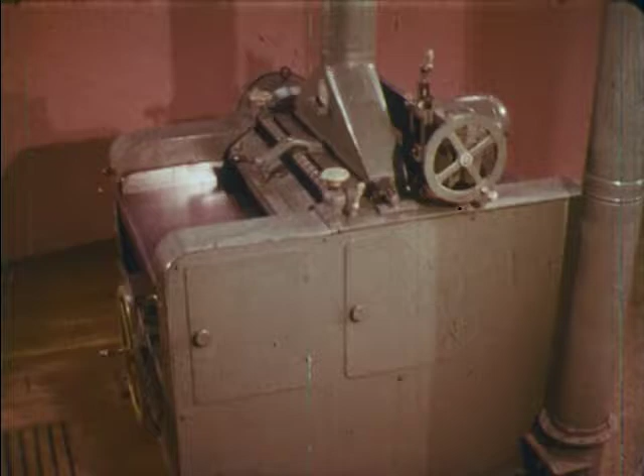The single-surface planer planes lumber to an even thickness. It is usually one of the largest and most expensive woodworking power tools.

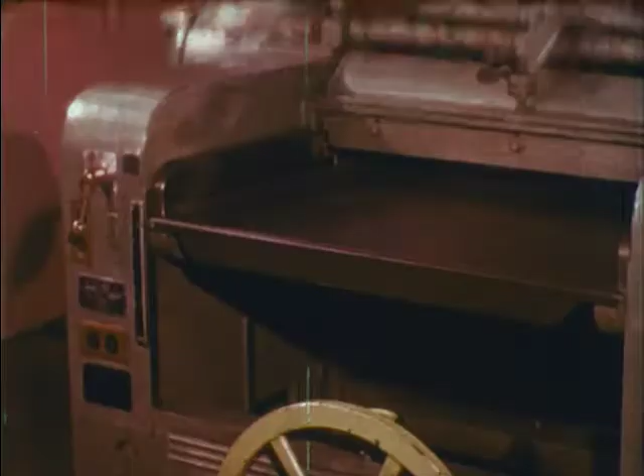This machine makes it possible to easily plane a number of pieces to exactly the same thickness.

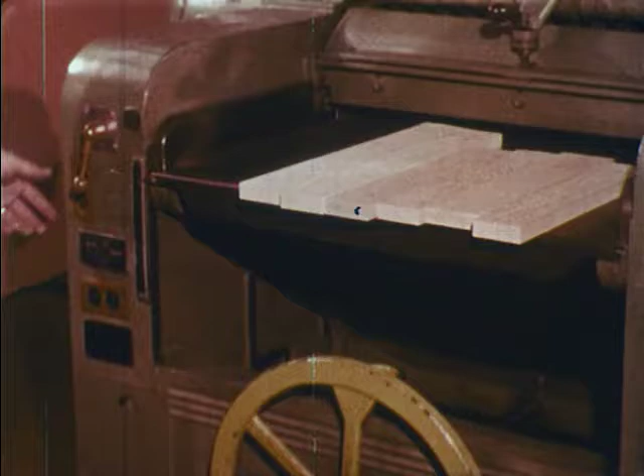If its capacity permits, it can plane large glued assemblies, such as cabinet tops, to a uniform thickness.

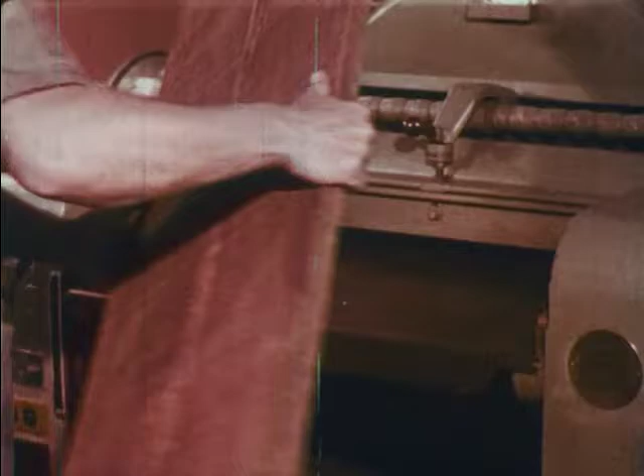The question is often raised: why not joint both faces of narrow stock on the jointer instead of using the planer? Maybe this piece will help clarify this question.

One face has been surfaced on the jointer, the other is still rough. We could smooth the rough face on the jointer, but the piece would not be the same thickness throughout. Regardless of the number of joint cuts, the piece would not have parallel faces.

Running the same board through the planer will produce parallel faces because it cuts off the top in direct relation to the bottom.

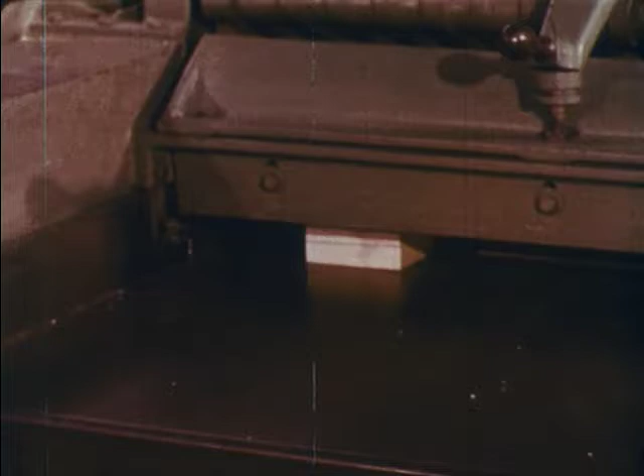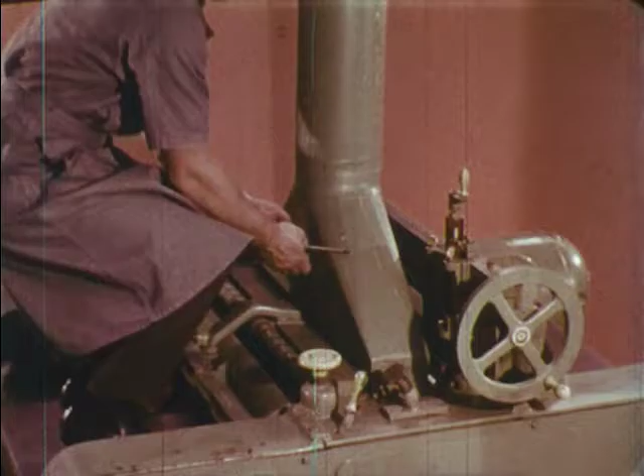The cutter head is located directly below the exhaust shroud. The size of a planer is determined by the maximum width of stock it will plane. The length of the knives determines this width. This is a 30-inch planer, therefore it can plane stock 30 inches wide.

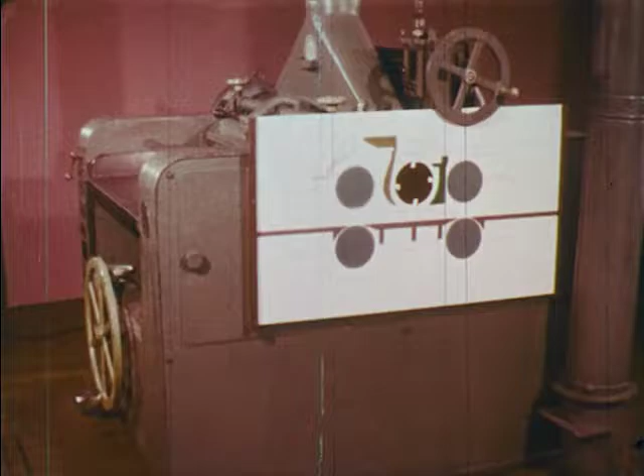The primary parts of a planer are the upper and lower infeed rolls, chip breaker, cutter head, pressure bar, upper and lower outfeed rolls, and a table that adjusts to various heights. This adjustment determines the finished thickness of stock being planed.

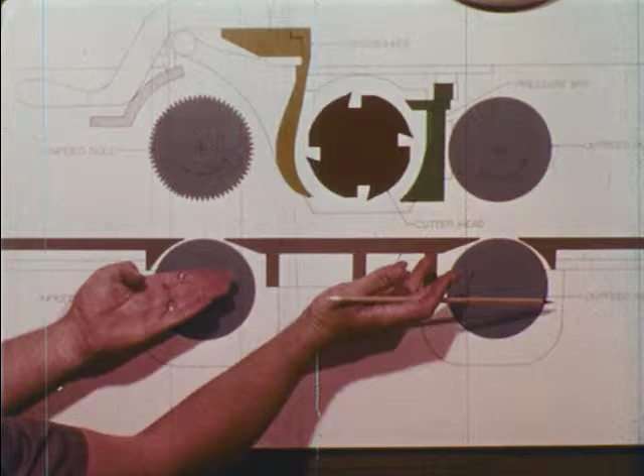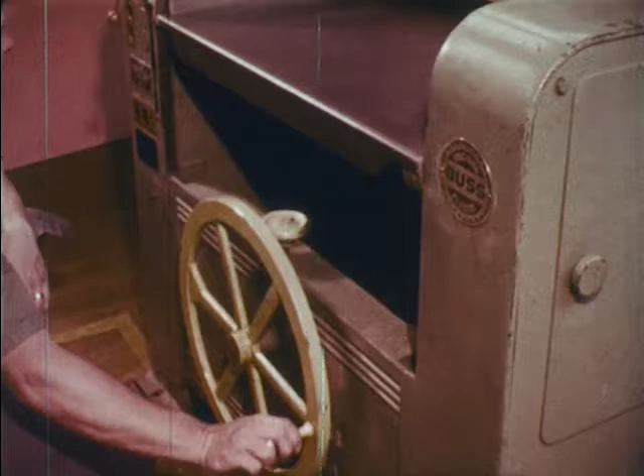Do not operate the machine unless the exhaust is running. This wheel raises and lowers the table. If several pieces are to be run, it is advisable to lock the depth of cut adjustment.

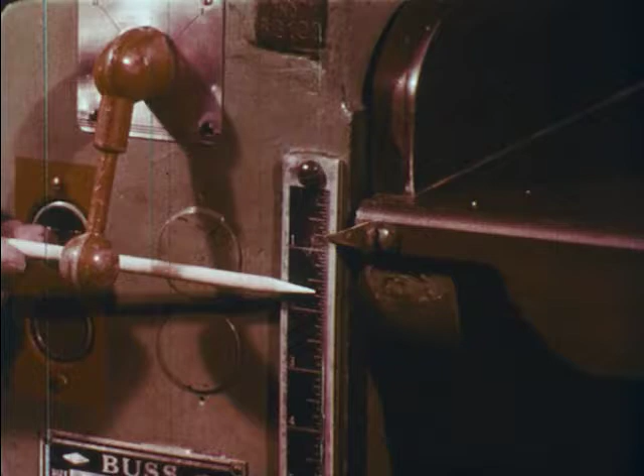A pointer indicates the distance between the table and knives. This is the on-off switch. This switch controls the feed roll speed.

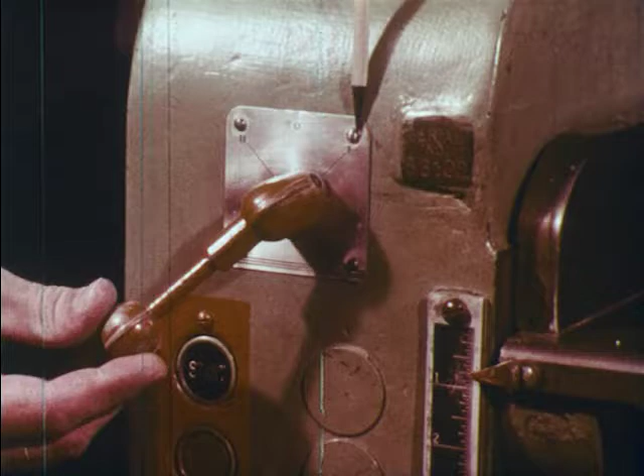The number 1 setting produces the smoothest cut and is desirable for at least the final cut. The number 2 setting runs the board through faster. The resultant surface is slightly rougher, but if several passes are required, time can be saved by using this speed.

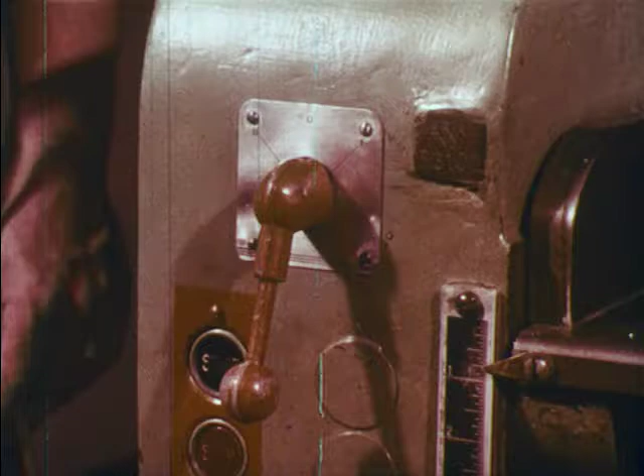At the 0 setting, the feed rolls do not rotate. The machine must be turned off before applying the brake.

The planer is a self-feeding machine. The 4 feed rolls push and pull the stock past the cutter head.

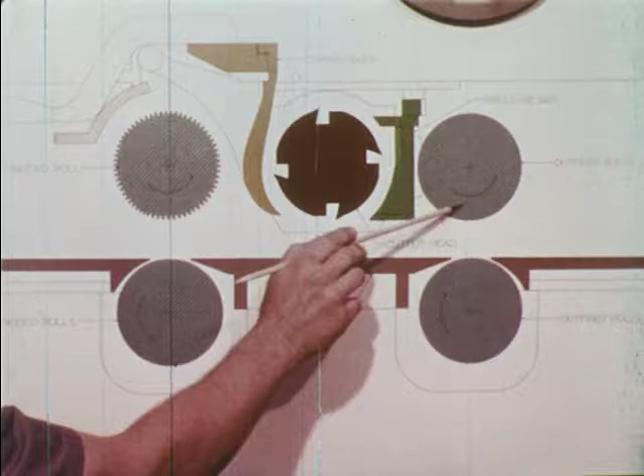The top of the lower feed rolls is usually set approximately 8/1000ths of an inch above the height of the table. This reduces friction of the stock with the table.

The height of the table should be set approximately 1/16 to 1/8 of an inch less than the thickness of the stock. As the stock is fed into the planer, the infeed rolls grab the stock and push it under the chip breaker and into the cutter head.

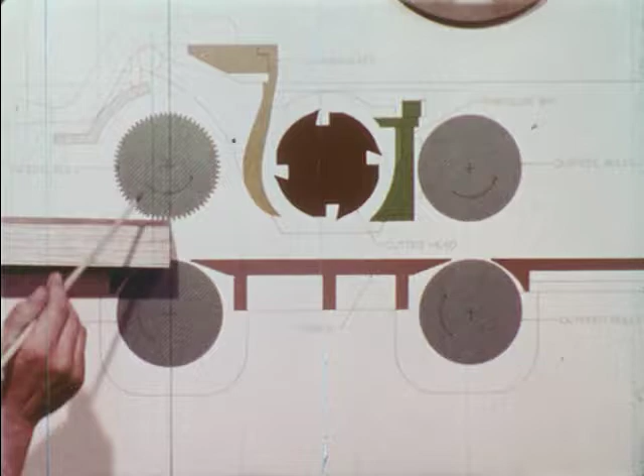The upper infeed roll has a corrugated surface and is usually made in sections so it will grip most any surface. The chip breaker prevents long chips and splinters from being torn out of the face of the wood ahead of the knives. The cutter head rotates in a direction opposite the upper feed rolls.

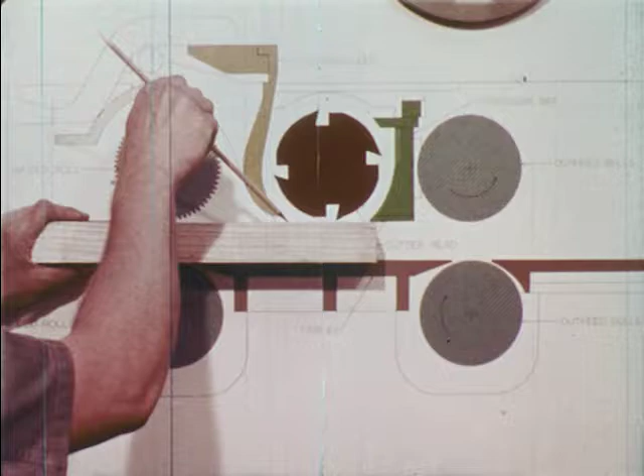The grain of the wood should angle down as it moves into the knives.

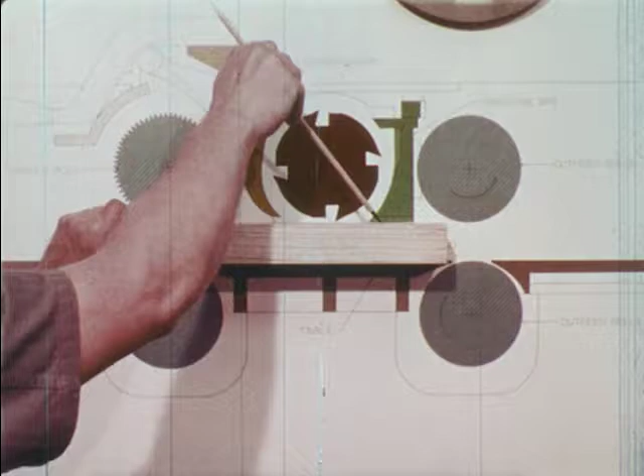The pressure bar exerts pressure on the newly surfaced board and holds it firmly to the table. As the stock progresses, it is squeezed by the 2 smooth outfeed rolls and is pulled on through.

The stock must be as long or longer than the distance between centers of the infeed and outfeed rolls. The distance between centers of rolls on this planer is 14 inches.

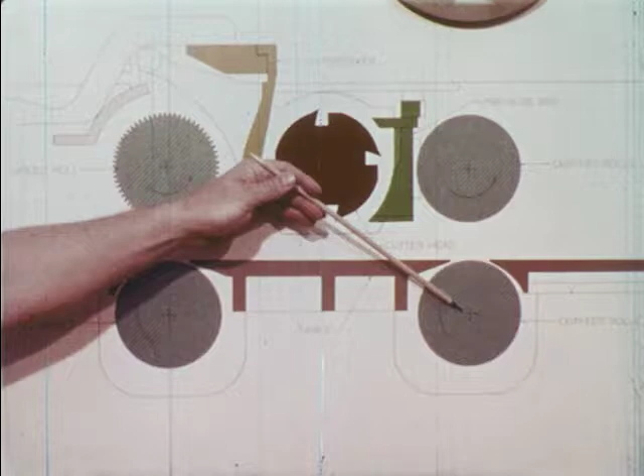Pieces shorter than this will stick and not feed through. As the board is released by the infeed rolls, it will not reach the outfeed rolls and consequently cannot be pulled through. Actually, the stock must be planed for 14 inches or it will become stuck.

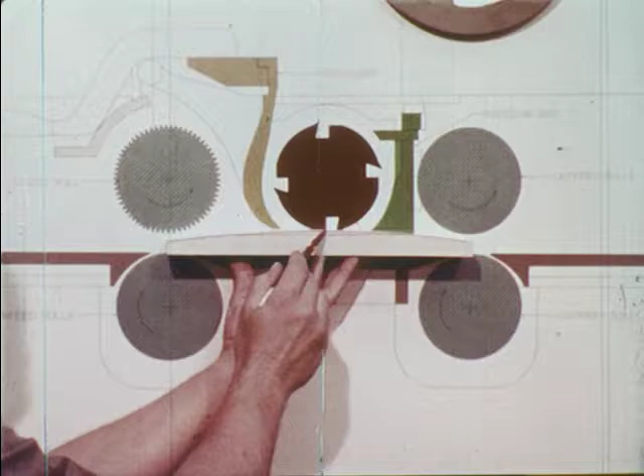This unusual piece is 14 inches long and 7/8 of an inch at its thickest point. A maximum cut of 1/8 of an inch will not remove enough wood to allow the outfeed rolls to pull it through. It may be necessary to remove part of the excess wood by hand or with some other power tool such as the bandsaw before running it through the planer.

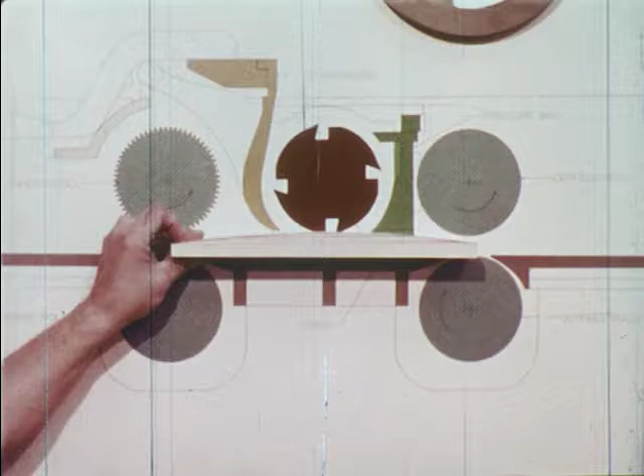Before using the planer, obtain permission from your instructor. Make sure no others are in the operator's safety zone, and protect your eyes by wearing safety goggles.

Do not run stock that has been sanded or painted because it will dull the knives. Use only clean lumber that is free from loose knots or other structural defects.

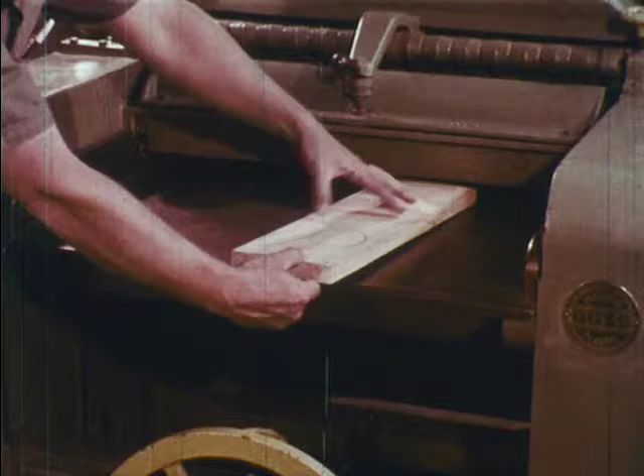When a board is not smooth and flat, plane one face true on the jointer before sending it through the planer. This piece has now been jointed. The planer surfaces the top in direct relation to the bottom, so place the flat, smooth face down.

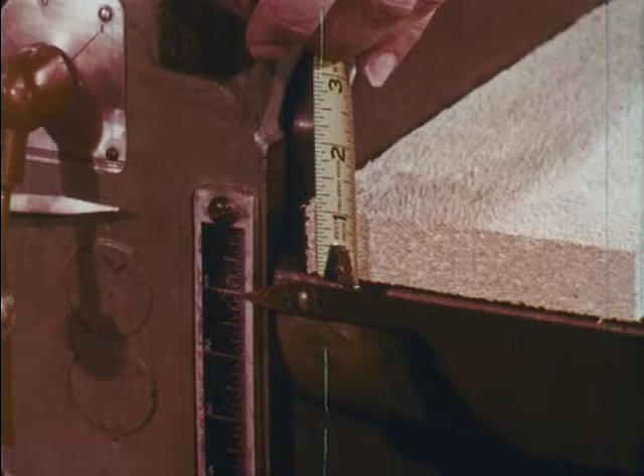The depth of cut scale indicates what the thickness of the stock will be after it has been planed. Therefore, to calculate the correct setting, measure the thickness of the stock to be planed. Subtract the approximate cut desired, and the difference is the correct setting. A maximum cut is 1/8 inch on narrow stock and 1/16 or less on wide stock. If more than this is to be removed, it will take more than one pass through the machine.

For example, if narrow stock measures 1 inch thick and we want to remove the 1/8 inch maximum, set the pointer on 7/8 of an inch. Then run the stock through.

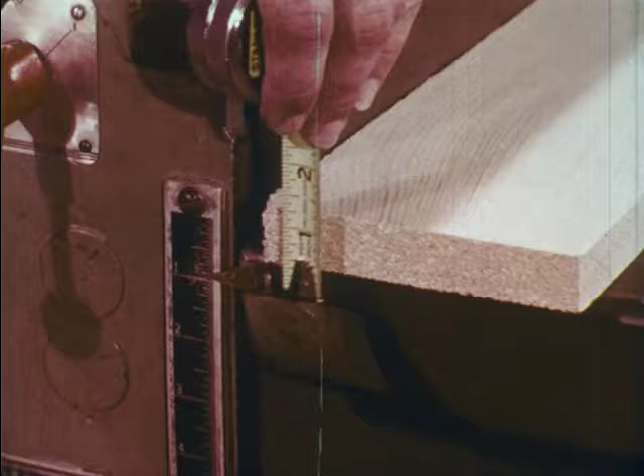If the finished thickness is to be 3/4 of an inch, reset the indicator to 3/4 of an inch and run it through again. Allow material to travel completely through the planer before making any additional depth of cut adjustments.

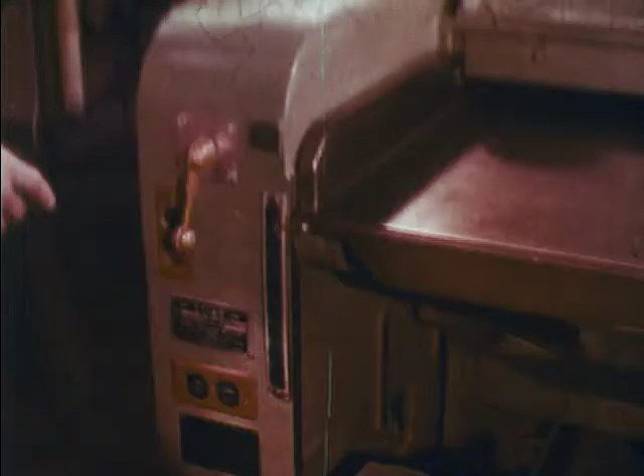Do not run wood through more than once at the same setting. If this piece is run again at the 3/4 inch setting, nothing will be removed, but the corrugated infeed roll will press indentations into its top face.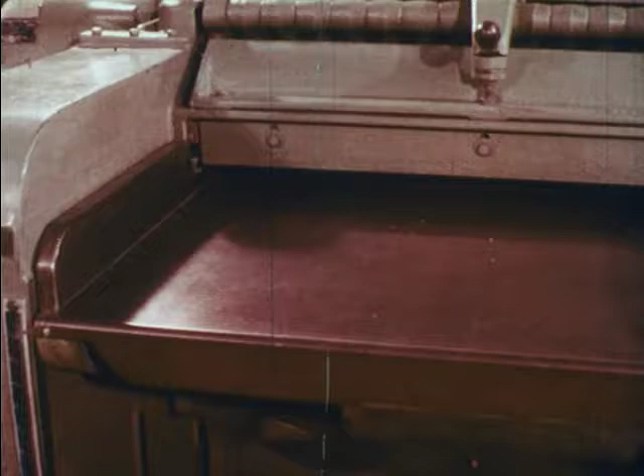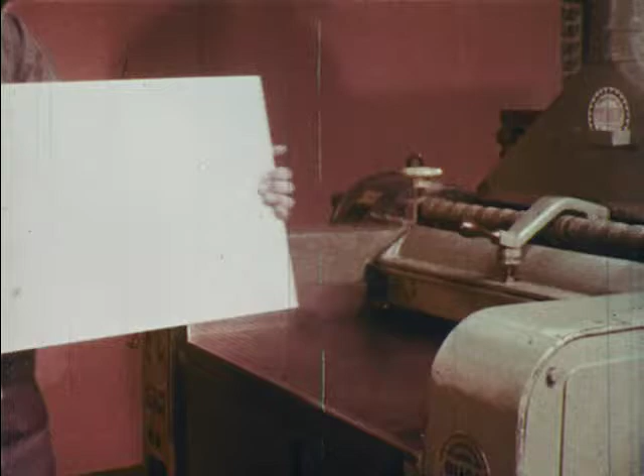Always feed the stock with the grain, never across the grain. Do not attempt to plane plywood. Feed pieces by the edges.

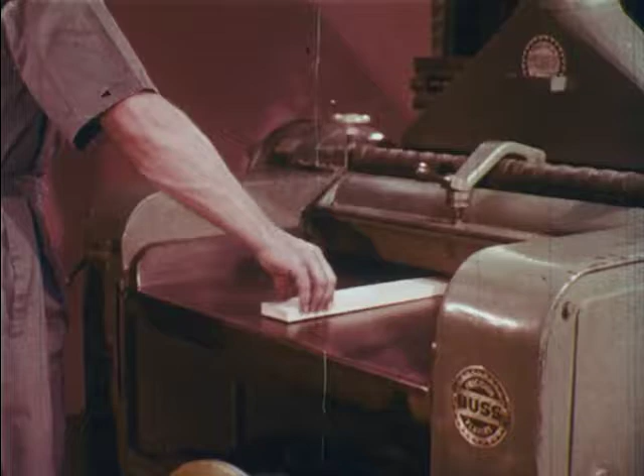Never put fingers between stock and the infeed table. After the stock starts through, remove hands from the stock and stand in an upright position to the side of the machine to avoid being in line with a possible kickback.

Keep hands away from the feed rolls and away from boards gripped by the feed rolls. Be careful not to stand directly in line with the machine, and never attempt to look through the feed rolls when the machine is running.

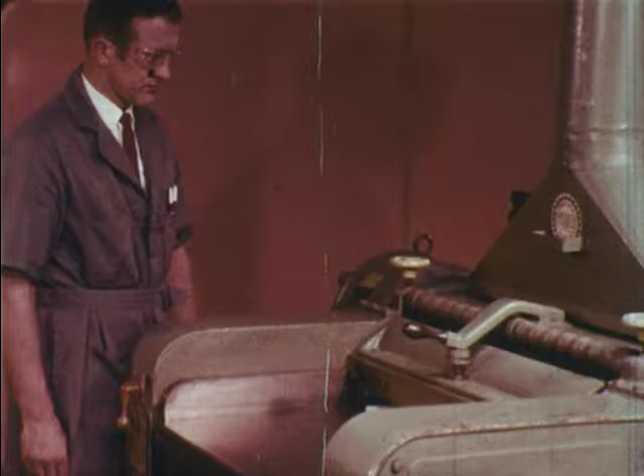Carry stock around the planer. Do not hand it over the top. Turn off power after using planer and stand by until the machine has stopped.

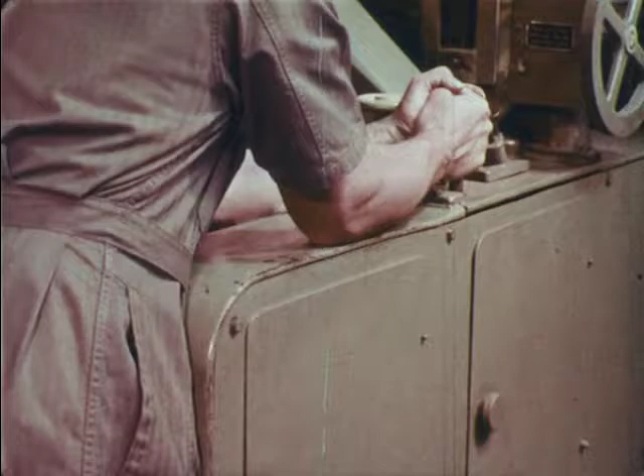If stock becomes stuck while being planed, quickly shut off power and stop machine with the brake. Different makes of machines may need special directions concerning this and other malfunctions. Notify the instructor of a malfunction before attempting to run the stock again.

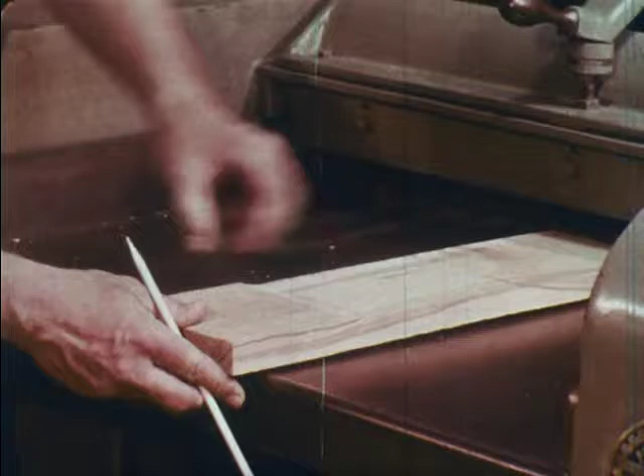The two primary reasons for stock becoming stuck are trying to plane stock shorter than the distance between feed rolls, or as illustrated, attempting to run rough or irregular stock with its rough surface down on the table.

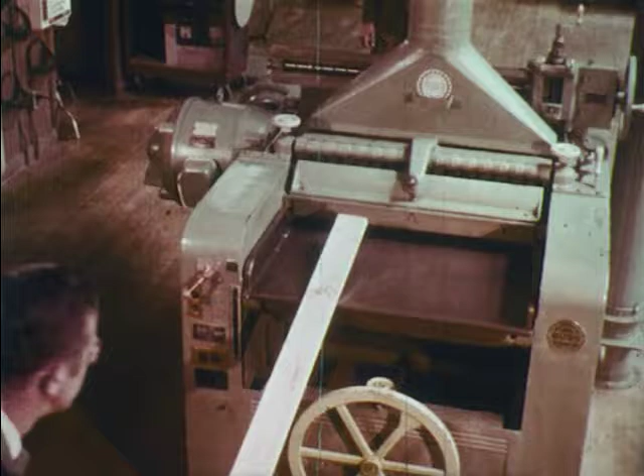Always have a helper tail off long or heavy stock. Extremely long stock should be supported on both ends.

Thin stock will tend to bow down or vibrate and be caught in the planer. Run stock 3/16 of an inch thick or less through the planer on top of a surfaced support board. The support board should be at least 3/4 of an inch thick and wider and longer than the thin piece to be planed.

Adjust the depth of cut to slightly less than the combined thickness of the two pieces. Place the thin stock on top of the support board and feed it into the planer as you would thick material. This is a special setup and should be checked by the instructor.

Short pieces of the same thickness can sometimes be planed by butting them end to end and following the last short piece with a longer piece. This can be quite dangerous and should also be checked carefully by your instructor.

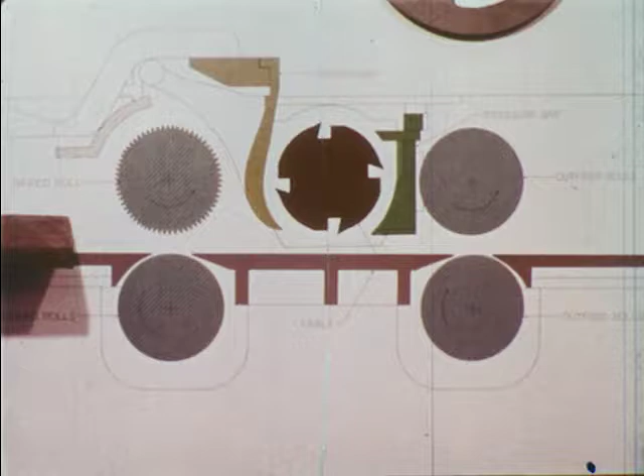Let's examine this operation step by step. The first short piece would become stuck by itself. It would not reach the outfeed rolls.

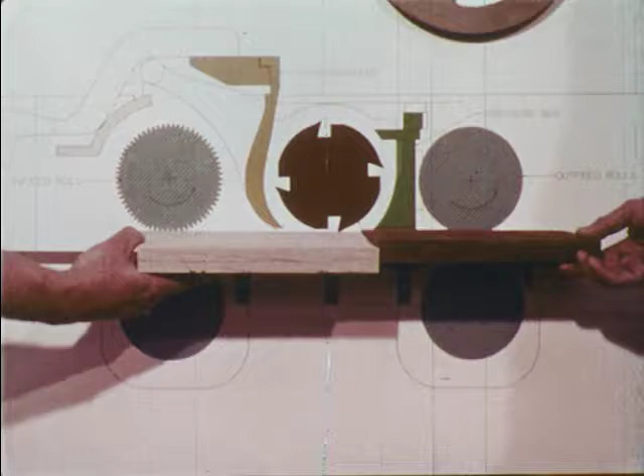If followed by a second short piece, the first piece would be pushed far enough to be grabbed by the outfeed rolls and pulled through. But the second short piece would still become stuck in the planer unless it is pushed through with another piece.

The last piece through, therefore, must be at least 14 inches long, or as long as the distance between the infeed and outfeed rolls.

If you plan to glue boards together and then surface the glued assembly, remember to leave the stock as thick as possible and definitely thicker than the desired finished dimension until after it is glued.

For example, if you want an assembly to be finished at 3/4 of an inch thickness, you obviously cannot run individual pieces to 3/4 of an inch. Glue them together and run the glued assembly through the planer.

To plane rough stock for the parts of a large item of furniture with a hand plane would take considerable time and effort. The planer easily and accurately completes this difficult task of planing the parts of this hope chest to the desired uniform thickness.